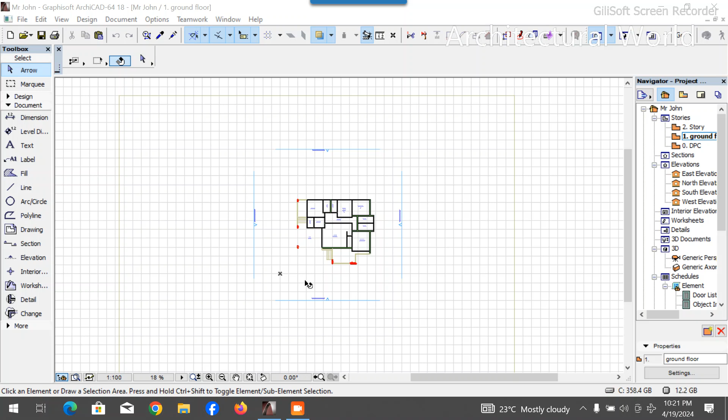So we're gonna be continuing from where we stopped previously, on our previous class. Okay, so let's keep going, guys. Let's keep cracking. Okay, what we wanted to do was to extend this upward. Let's make this. I think this beam is too high, guys. Let's make a little reduction. Let's reduce the thickness of this beam to 150 millimeter.

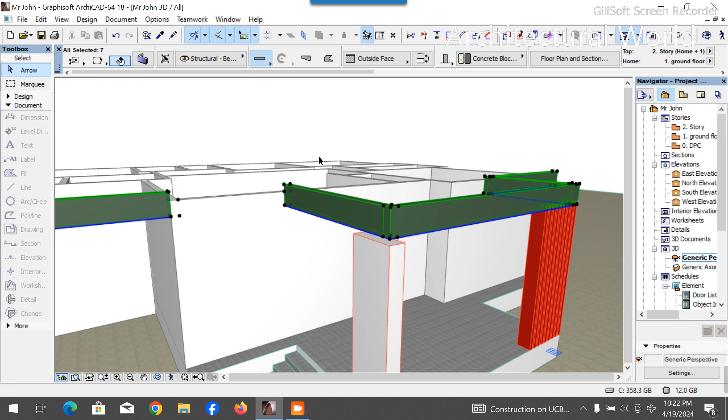Okay, let's change this first to 300. Let's bring it down to 300. Then let's change this to 150 millimeter. Okay, that's 150 millimeter. Okay, still on the high side.

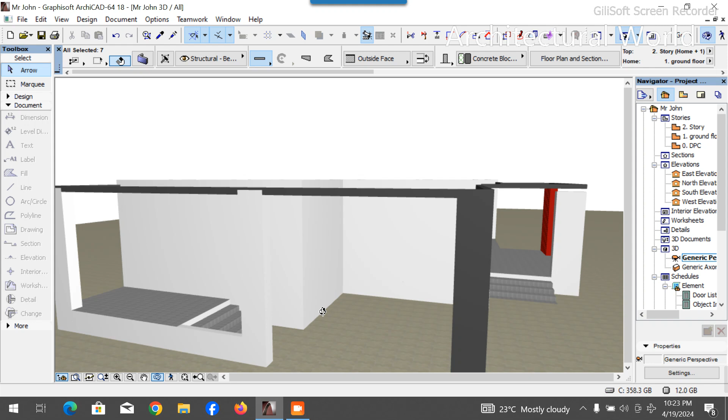Okay, minus 150 millimeter. I just want it to come up a little bit. Let's check something. Okay, 150 millimeter. I think I'm okay with this. I'm okay with this 150 millimeter. So let me take this one up a bit.

We're gonna increase this. Sorry guys, I'm not gonna be more audible because I'm stressed out. I just want to get this class completed before I do any other thing.

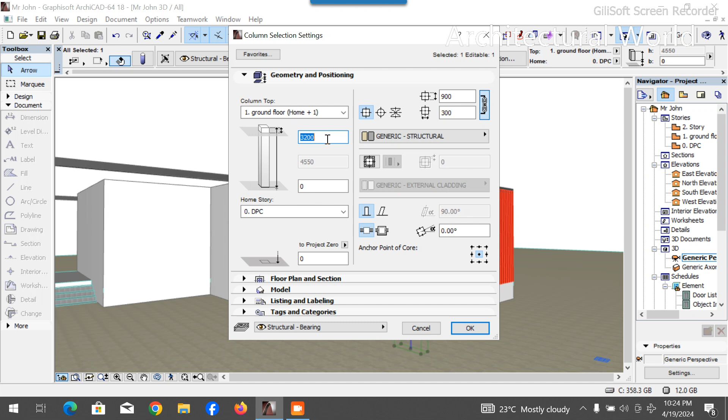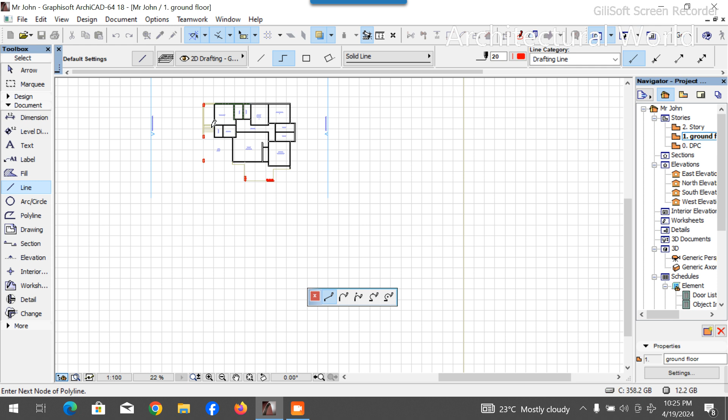So I guess you guys should already know what I'm doing. So just pick the right tools, follow what I'm doing, so you get it done the way I'm doing it. Okay, now we have this, and we need a slab. Let's go down to our ground floor and pick our line tools. I want to create a slab here. Okay, so I'm going to take a slab of 600 millimeter. I'll drop it here. I'll come down to this spot.

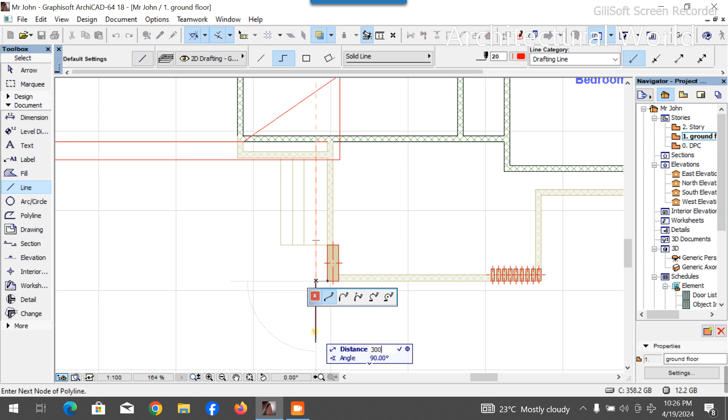I want to align this wall to this. Then take a slab of 450 millimeter. Align to this. Drop it here. Okay. Now I need a slab of 300 millimeter here. All those things that you see that I'm doing is a guide to the slab because I want the slab to be on a straight wall. So I'm bringing this here. Then I'm taking 300 millimeter from this angle, dropping it here.

Okay. I need a slab of 300 millimeter. I'm putting a line tool in the area where I need slab. I don't know if you get what I'm doing. I'm putting a line right at the spot where I need slab. Okay, drop this here. Align this to this. Okay, now I'm going to have a slab on all this section, and the slab is going to come directly.

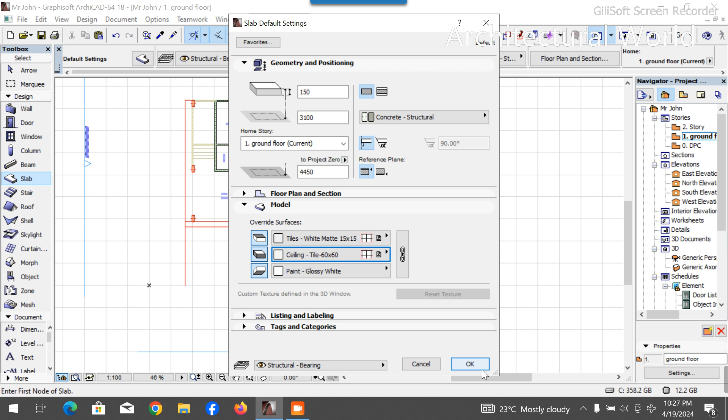Let's go to design tools, come to slab tools, pick our slab layout. Okay, change this to 150, then I change this to 3100, then that has to be ceiling. Okay, I click OK. I'll pick all my edges.

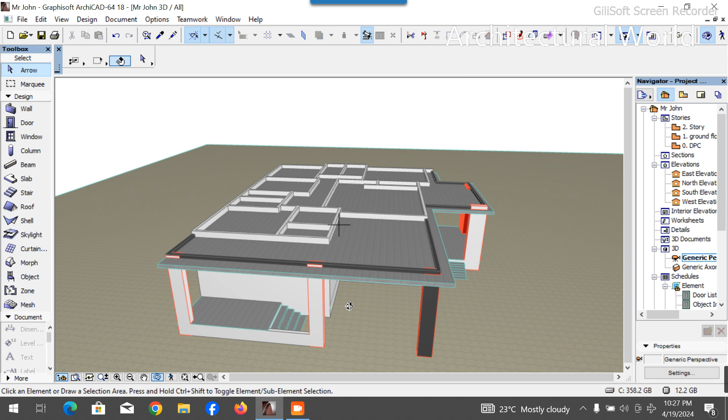So guys, you've seen why I created those lines. Those are a form of helping guides. These are the edges that I'm going to be clicking, and that is why I created the line to help ease my job. You can see very well for yourself. Come back to the end spot, I terminate. That is it. So let's go to 3D. Perfect. So we just created the slab. Come down to this angle, come here.

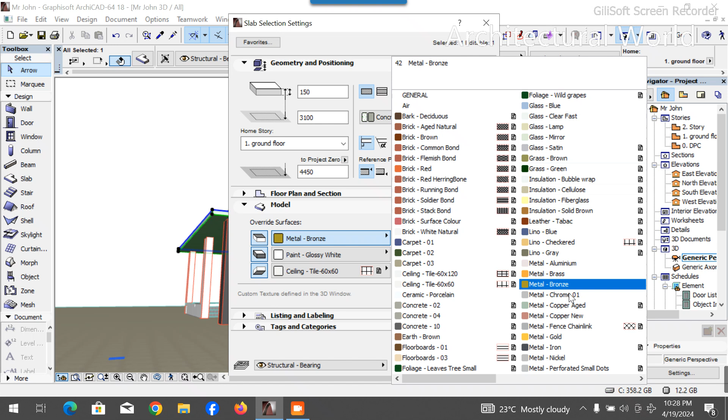So edge has to be glossy white. Let's change the edge to be glossy white, then the bottom to be ceiling. Okay, the top is not necessary. I think we should go with complete white everywhere. Let's change everything to white. Let's go for the glossy white. Okay, glossy white. Link all surfaces and click OK.

Now we still need to work. Let's make this to be 2.3 meter. Push top. That's going to be 2.4 meter push top. Let's see. 2.4 meter push top. Okay. Let's increase this to 50 and see. Okay, perfect. Perfect, guys. So it's coming out greatly. Let's keep going. Okay.

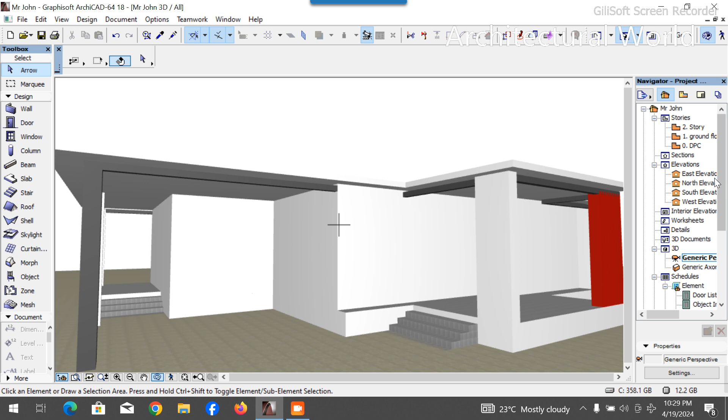Ouch. Sorry, guys. I just made a mistake. I don't want to design it this way. Let's take this slab off first. Then let's come to this way and take a slab tool here. Let's create a slab from this angle to this angle. Then we have some slab at this spot and some slab at this spot.

Sorry, there's something I want to design. I want to have a double slab, so let's align this wall. Then let's change this to 225 millimeter. I want to have a slab here, a column here. Then let's drop this here and align this. So let's go back to our design tools.

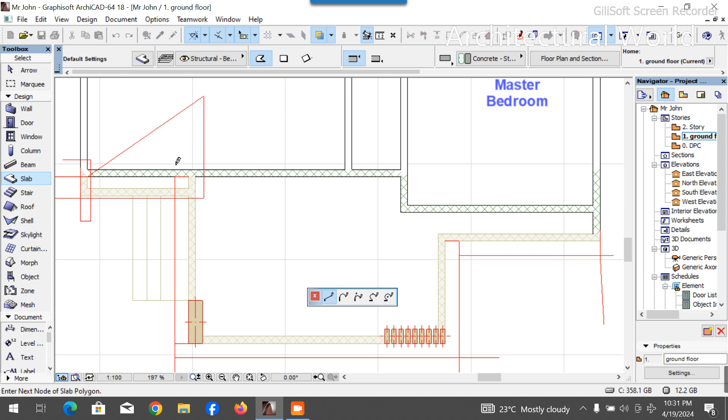I'll pick a slab layout. Take the first one from this angle to this angle. Then we have this. Okay. To this angle. Let me think of what I'm creating. Let's add this. Okay. We have this, we have this, we have this, and we have this.

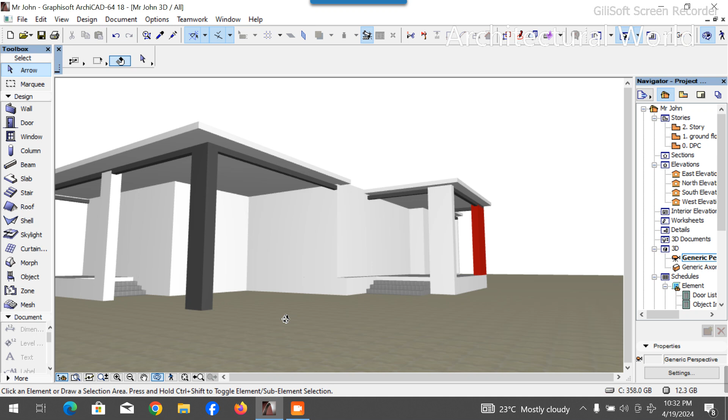So we change this to 3400 as we did the first time. 3450. Okay, 3450. Let's see that on 3D. Okay, 3450. Let's change this to glossy white. Bring this down. Okay.

Now we're gonna have a column here. Let's copy this column, paste it here. Then we change this column to 225 millimeter, 225 millimeter, and we change this to, okay, we can let it be that way. So we bring this to this. Perfect. Let's see that in 3D.

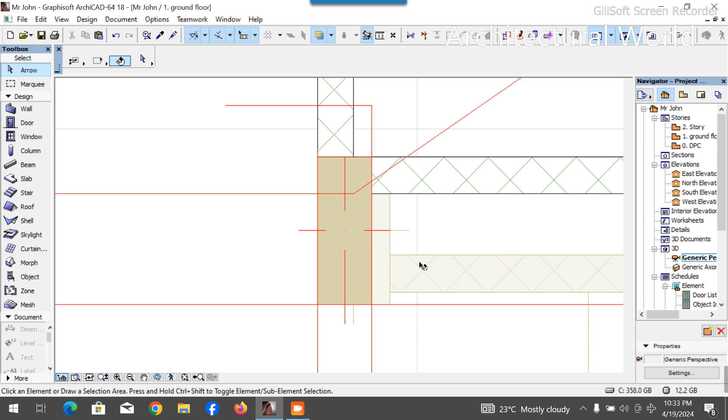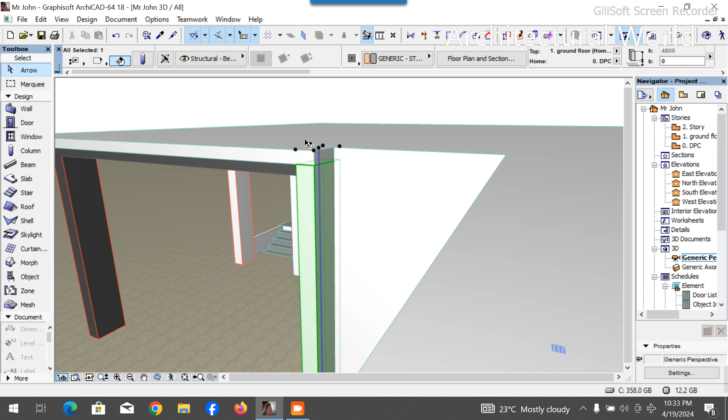It's white, glossy white. Okay, let's go to geometry. Let's change this to 3450. Perfect. Okay.

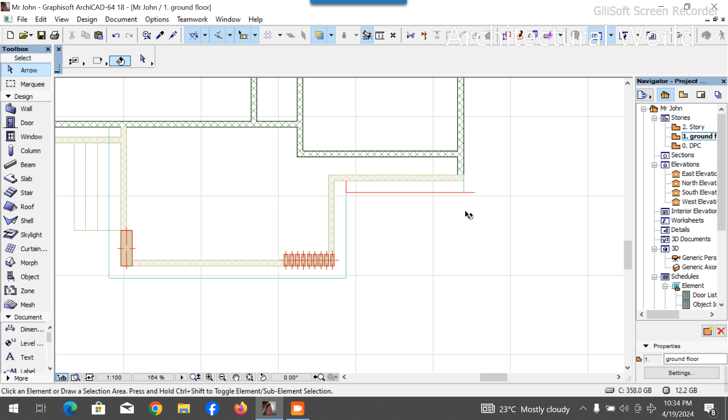So right now, let's work on the door layout. Let's go back to our ground floor and create our openings. It's time to create our openings. Now we won't be needing this anymore. The guides that I created the first time won't be needed anymore, so you can take them down now because their job is done. Bring this off, bring this off, bring this off.

Okay, let's go for our doors. Come down to our door settings. We pick our double entrance door. Let's choose this. Then we'll come to the spot. It's just a simple addition. Let's change this to 300 millimeter. Then we'll come here and change. We're gonna put this to this. Then we put the handle to this. We change this, so solid panel.

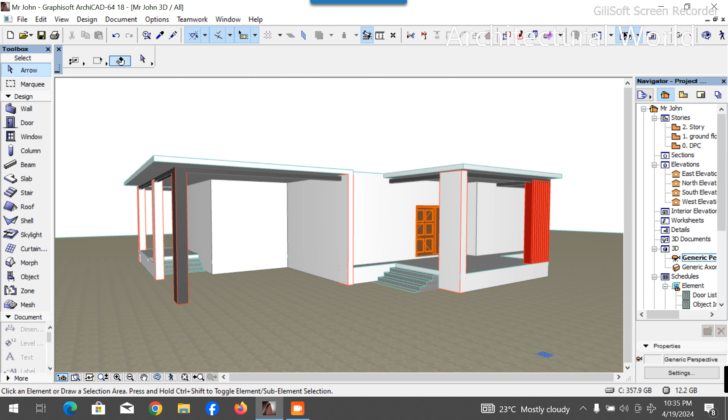We come down to this. What am I going to change? Okay, come down to layer. It's showing me glass layer, so come to model layer. We unclick use object, then we click OK. Here is where we're going to place our door. Let's drop the door. Okay. Let's see that on 3D, guys. We just have our door.

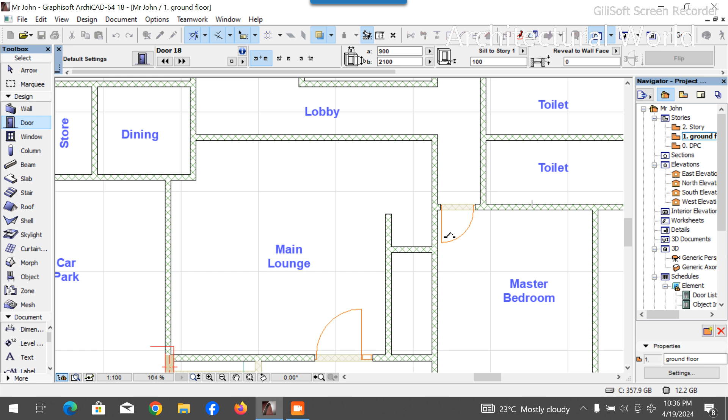Okay. So let's go back to door settings. Pick single doors. Let's pick a single door. Come here. Right here, we have to create a door. We need a door of 900 millimeter here. One door is needed here. Another door here. I want this guest room to face this way. Then we need a door here.

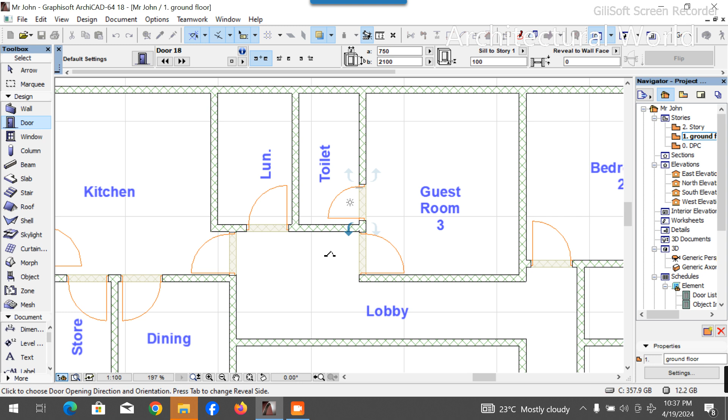We need a door here. We need a door here. We need a door here. Okay. Let's change this door to 750 millimeter. Toilet doors: I always use 750 millimeter for my toilet doors. So we're having a door here. Door here. Guest toilet door here. Okay. So let's drop this.

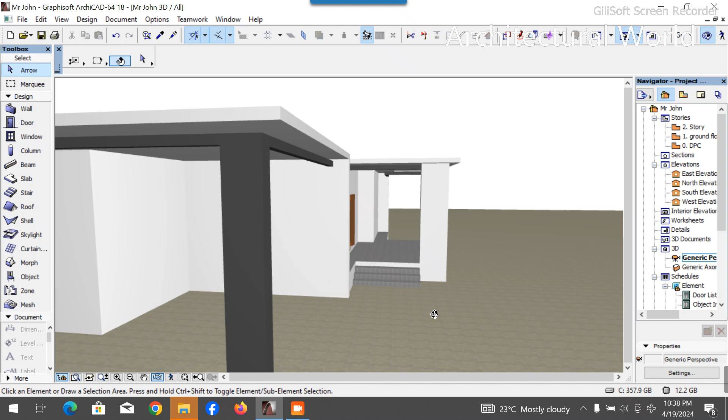Okay, guys. Let's say doors are completed. Let's see that on 3D. Perfect. You can see our doors are all completed. Okay. What else do we need?

Let's go for our windows to help bring out the beauty of what we are designing. So, come to window settings, change this to 900, sill to story, change this to 730 millimeter, and that is all you need to change here. Nothing much. Let's have a double sash window here. Let's have this, and let's have this. Since the garage is an open garage, I think we should have a window here, and also a window here. Let me check something. Hold on, guys.

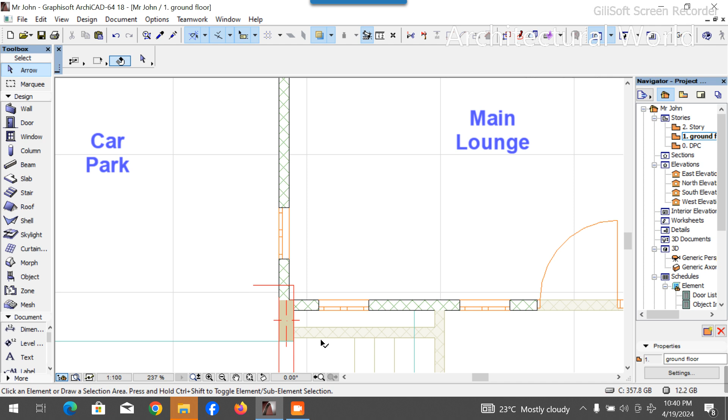I think this window is kind of big, so I'm going to change this window to 750 millimeter. Okay, kind of okay with this. So I'll drag this a bit this way. I don't think I'll be needing this. Okay, so I'll go back to my window, then I'll change this to 750 millimeter like I just did.

So I'm going to place my windows. I have one here. I have the other one here. I have one here. Then right here, I'm having two. Then kitchen, I'm having a double window here. Okay, laundry, I'm having this here. Okay, so dining, I'm having this here.

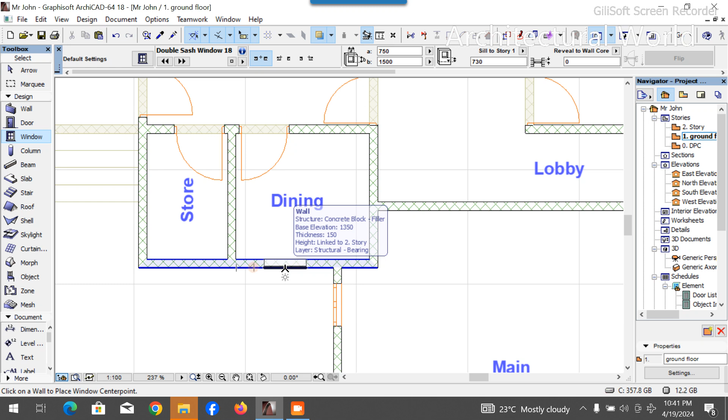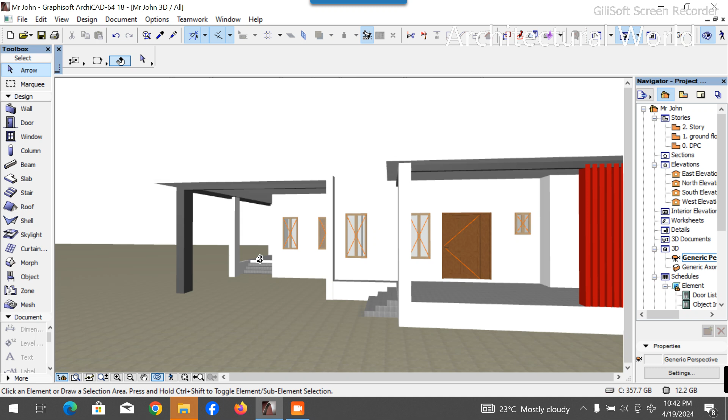We need one here. We put in another one here. Okay, let's go for this. Come here. Then let's have one here. Okay, that is all. Save your project. Check it on 3D what you have done. Perfect.

Okay, guys. This is coming out great. So this is coming to be dark gray. I want to work on the color right now. Let's change this to dark gray. I think I prefer it that way.

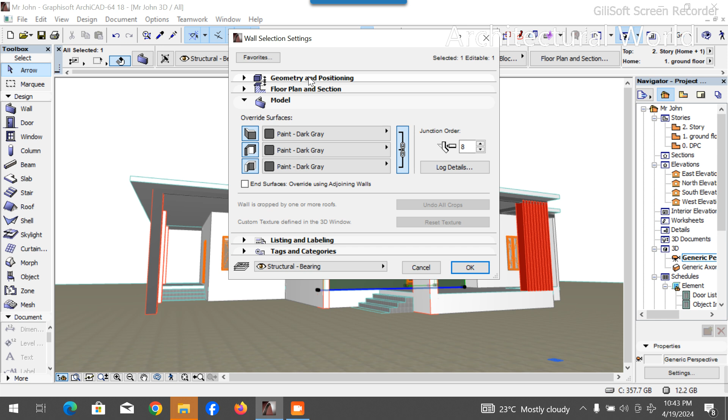Okay. Then I want to increase this wall by 150 millimeter. I want to add 150 millimeter, 1.5 meter to this. I think I'm cool with that. So I'll click this wall and add the same 1.5 to this. So how do I do that? That is to say, change this wall to 1650.

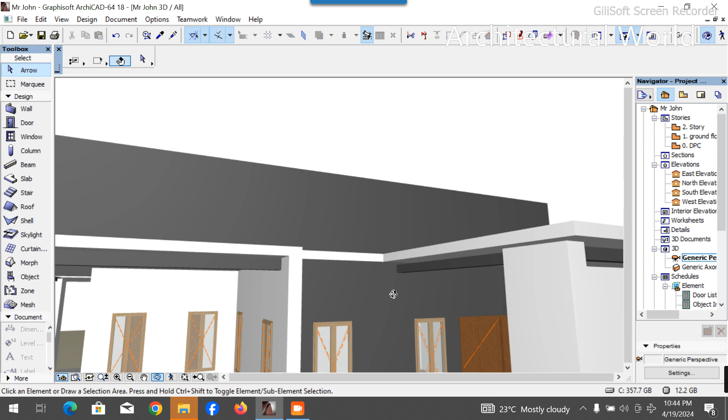Okay, I have to take away the 150 at the up. Let's make it 1500. Okay, perfect. So I got it right where I want it. Doing the same thing to this wall. 1500. Okay, that being done. We are having the same thing here. I'm adding 150 to this. Then click this wall. Add 150 to this.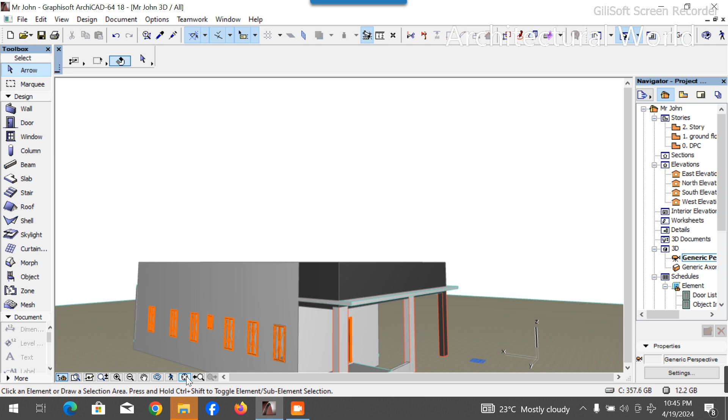Okay, let's rotate it this way. Let's go. 1500 to this, 1500 to this. You can pick these two walls and just get it done with 1500 to this.

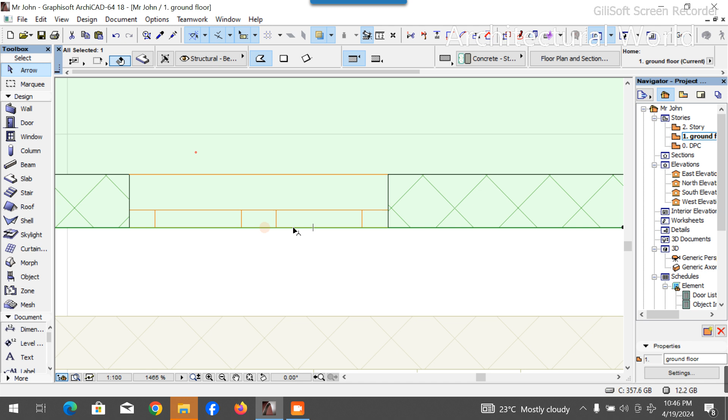Okay, so let's create this slab, it has to go in. So let's come here, pick the slab tools, pull it in, offset it in a little so it doesn't reflect. Let's see that on 3D. Perfect. So you can see it's no longer reflecting. Okay.

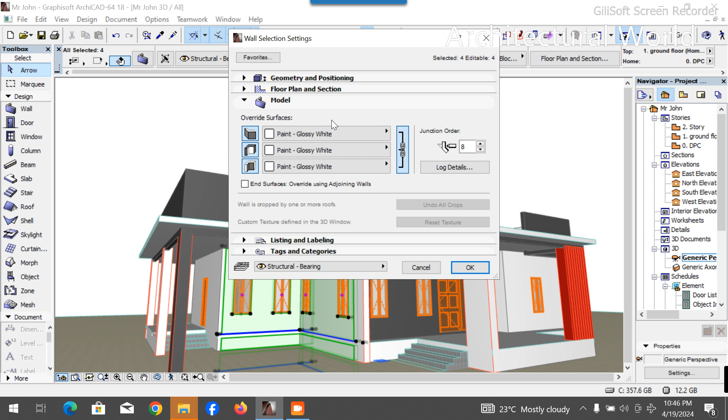So let's work this. Let's pick this. I want this to be one layer. Okay, I have to pick it with the ground floor. Let's pick this. Then change the model. I need a pattern model on that spot. Okay, let's try the wood model. Perfect. So I think this is okay. But we have to work on this slab.

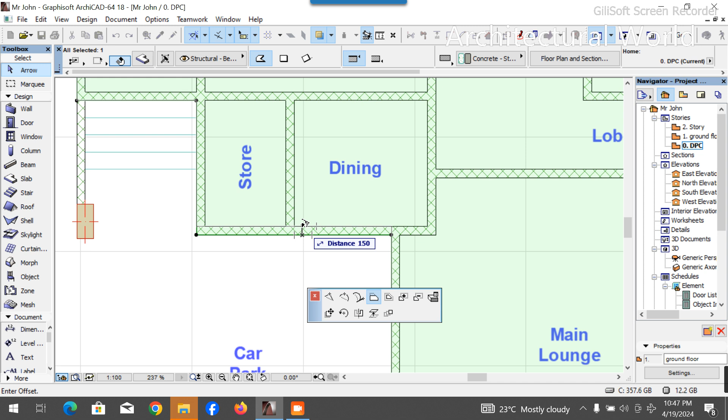I don't like it. So I'll come down to my damp proof course. Okay, I'll click this. Oops, this top. Okay, I have to move this off. Move off the concrete floor. Then click your slab tools and offset this in. Then likewise offset it this way. Check that on 3D and see before you go back. Perfect. I've taken it off.

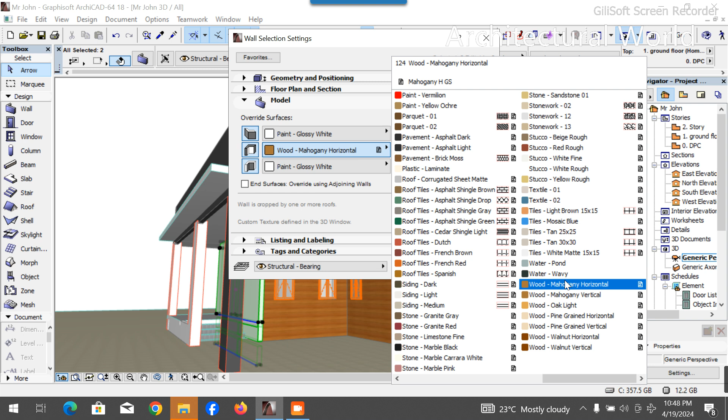So I'll go back to my 2D and move this back. Okay. So save your project, guys. Don't forget. Let's see what we just created. Let's change this edge. Let's have it along with this. We're gonna have a little disturbance right here. Unlink the surface, then go for what you choose, then align. Okay, so coming out greatly, you can see for yourself.

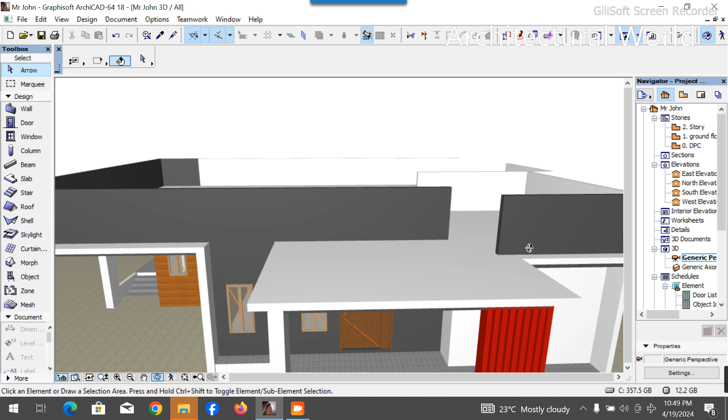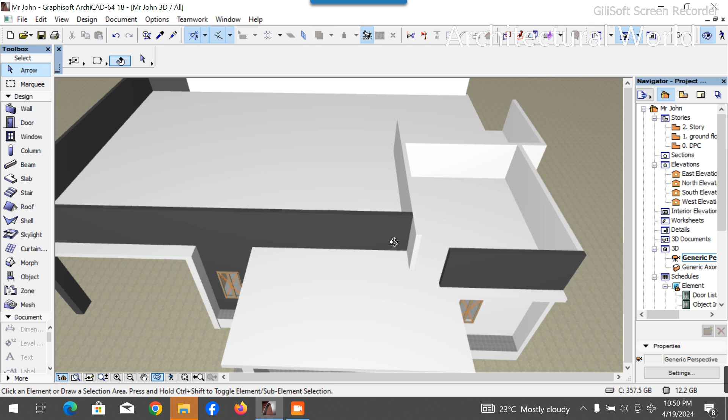What are we looking for? Need to align this wall. Okay, see. Why am I having this error here? I already aligned this wall to this wall, and this is the toilet wall. So that means this wall is not.

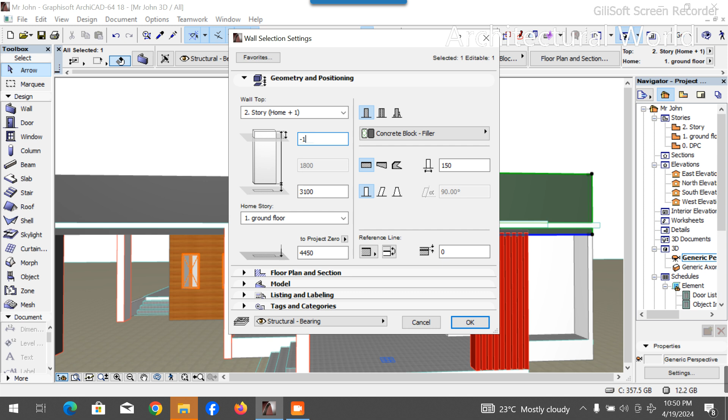I think I've aligned the wrong wall here. Let's just check something. I think I'm working on the wrong wall. I thought as much. I was working on the wrong wall. So which means I have to remove the 150 millimeter from this. This has to go back to how it was. Then this has to go back likewise.

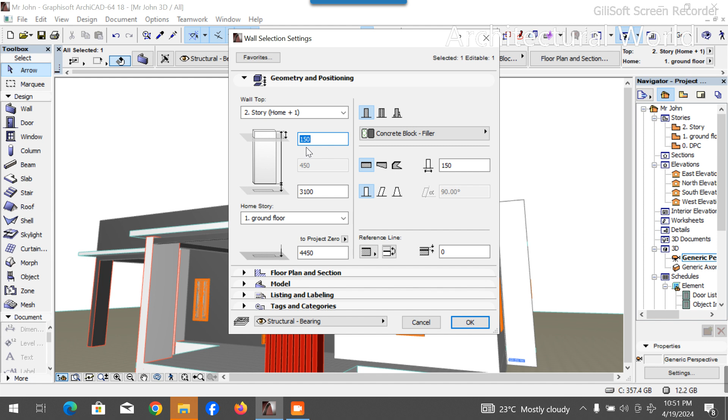Then I have to increase this a bit. Let's do this to be 50. Okay. Let's use gray on this. That's a balcony. So let's try the dark gray on this. Okay, coming out nicely.

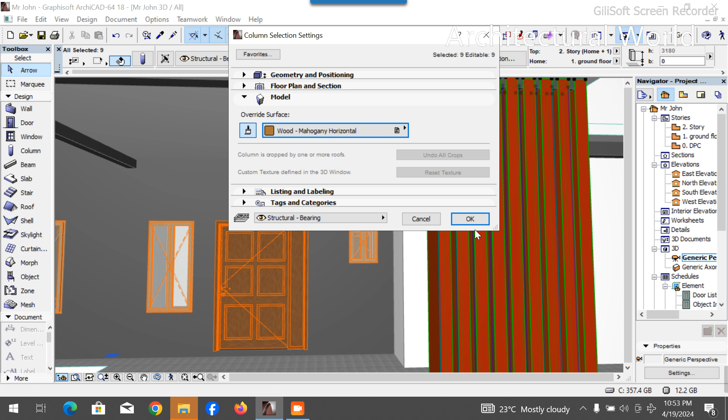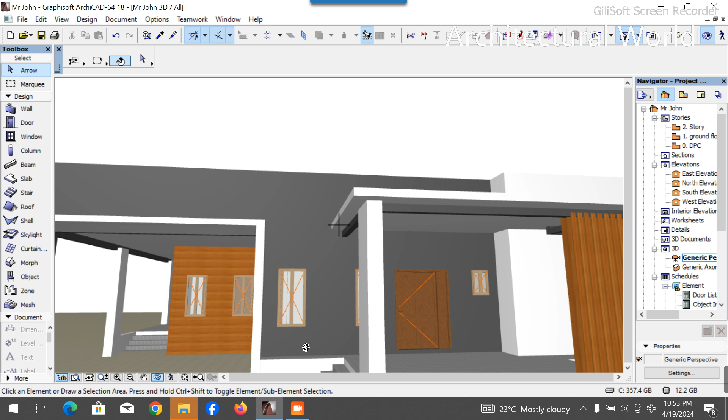Oops. Let's see what we got here. I need a different wall on this spot. So I need a shorter wall here. Let's go to our ground floor. I think we have to create a different wall here.

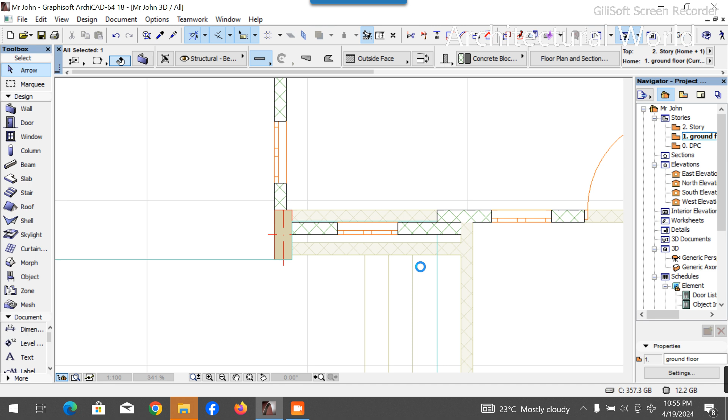Let's check something. Okay, I just made a little mistake. Let's work on this column first. I need a kind of color on that spot. So I'm having this color here, and I still want this color to come out some here. I don't want it that high, so I have to bring it down.

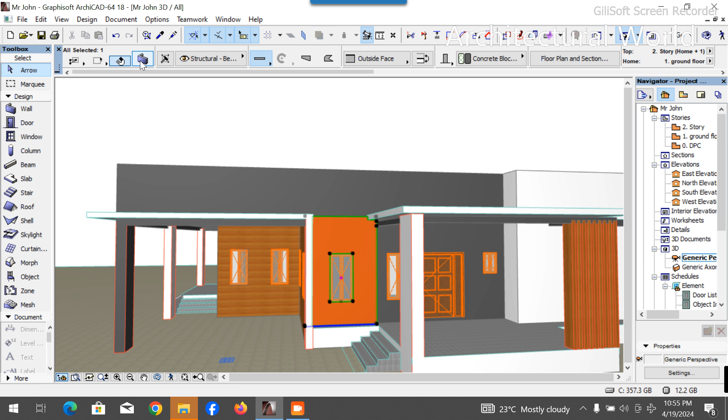Let me take away 300 from this. Take away 300. Okay, kind of fair. Okay, guys.

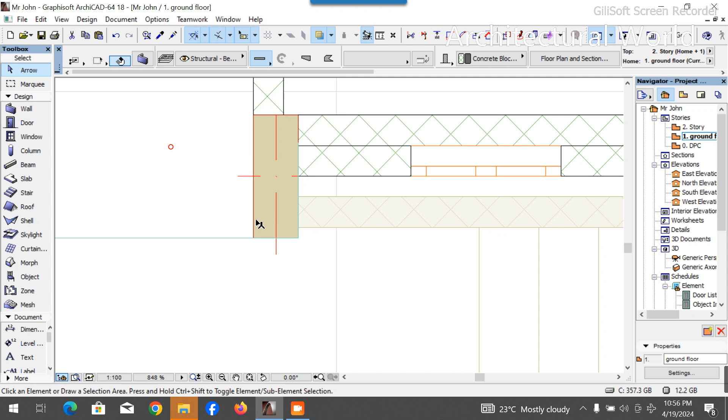Okay, let's come here. Let's pick this column. Okay, let's go. I need this to be here. So I'm gonna change this to 100 millimeter. Then I'll change this to 900. Move to match.

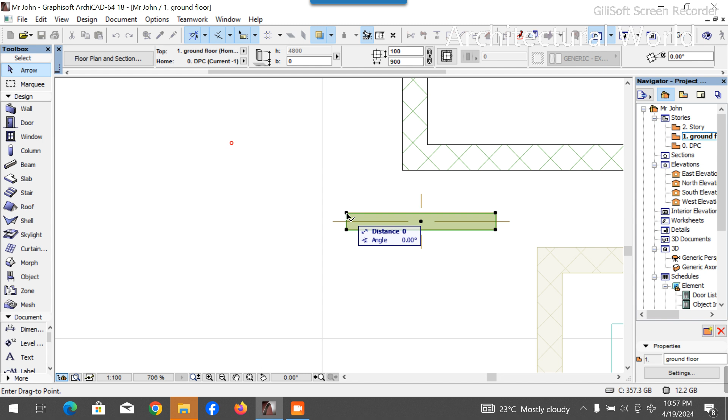Go to my settings. Come to the spot. I think I'm cool with this orange. Let's change this to the orange. I think I'm cool with it. Okay, I'm using the same. So let's check out on 3D. Okay, first I have to change this to gray. Let's go for dark gray.

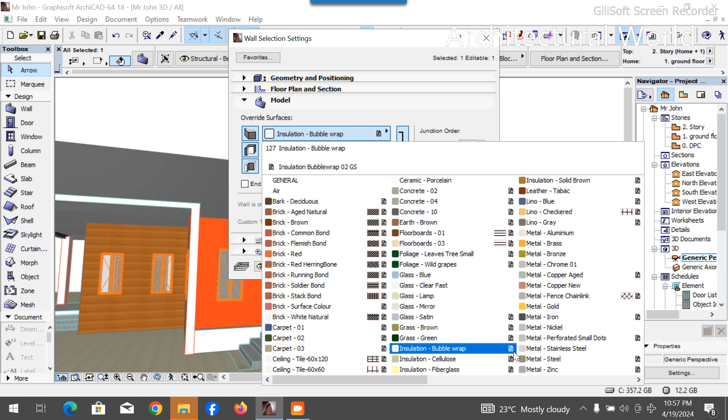Okay, I'm gonna solve that later. Let me just edge this first to dark gray. It has to be double wall there. So I'm gonna work this to, okay.

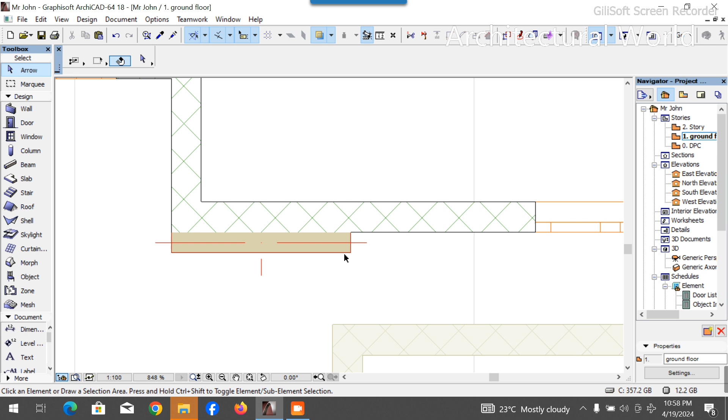So we wanna take this. You can decide to use anything to work this. Okay, let me take a slab tool for this. So I'll pick my slab tool. I'll go to my slab settings. I'll come to this way. I'll pick my orange. Okay. I'll link it all.

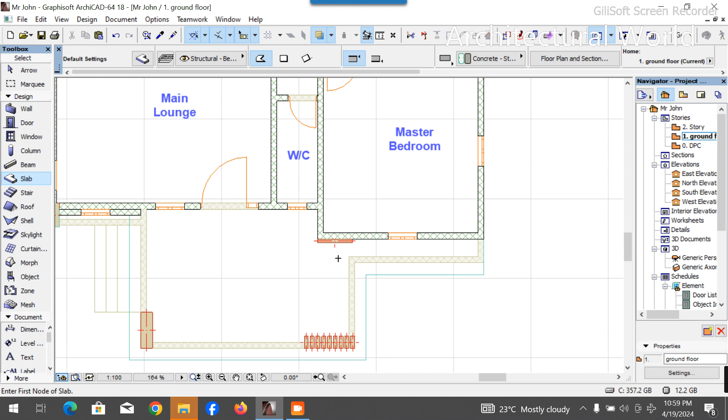Slab thickness, I'm gonna choose 700 millimeter. Then offset to home button. I'm going to determine this on the ground side. Then I'll take a slab square and pick this to match this. Okay, let's go.

Okay guys, see what I'm doing? So I'm just going to increase this slab thickness to be 900 millimeter and see it's coming down. So I'm going to take this to be 3400. To up, so I'm changing this to be 2600. Sorry, my bad. Coming to 3200. Okay.

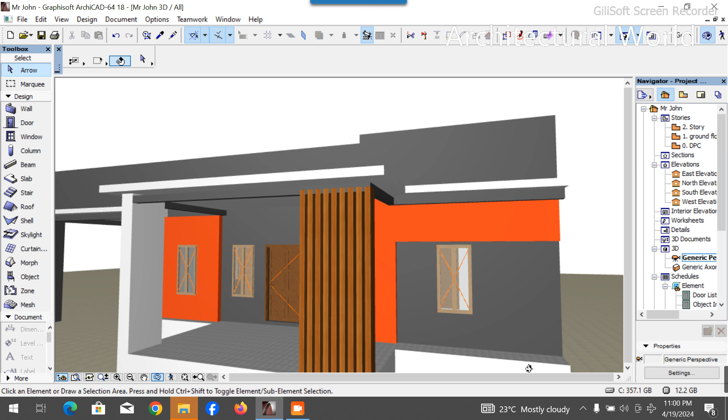Edge. Let's edge this to dark gray. Okay, so this is edged. I want this wall to be double wall. I want to create double wall here. So I'll come down to this spot. Then I'll pick this wall and drop it right here. Then let me align it. Okay, let's go.

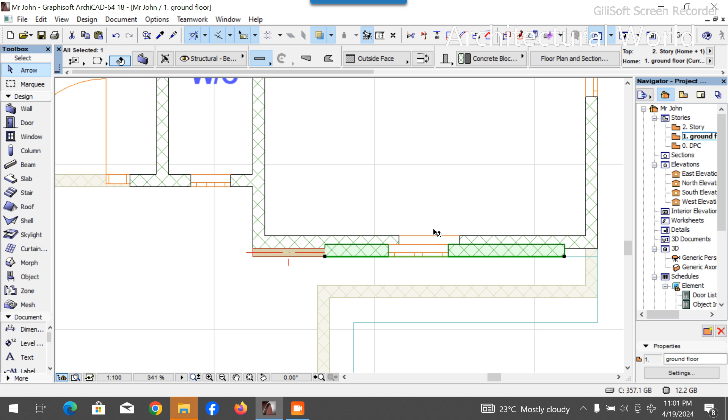I want to increase this wall to this wall. Then move this window to this spot. You can decide to take any of the window down because during construction you are not going to be using the double wall. The double wall is just for the spot. During construction you can work on the paintings, because I don't want to go through stress moving these walls up and down. That is why I'm creating the double wall for my 3D. So let's see something.

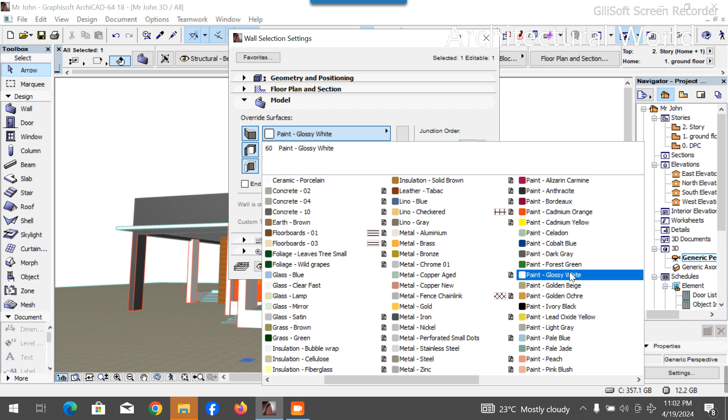Let's first of all change this to white. Let's go to glossy white, link all surfaces and click OK. Okay, don't forget to save your project.

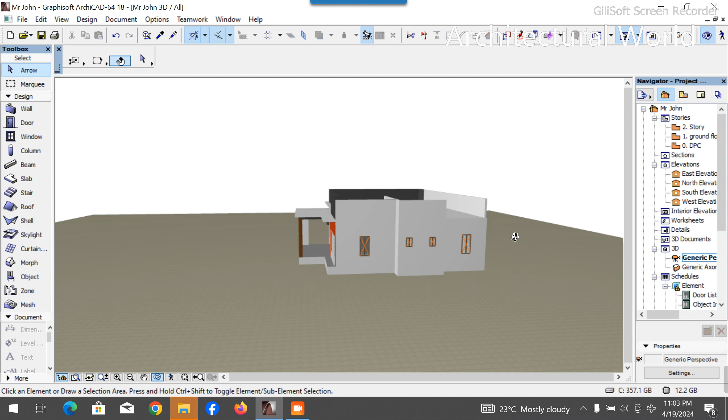Okay guys, let's put our rooftop first before we continue. We're going to be ending today's class on the rooftop. So let's go to the rooftop. I think one side is missing here, this side is missing. So let's come here, let's align this, then increase this geometry to 150 millimeter. Okay, so we come back here.

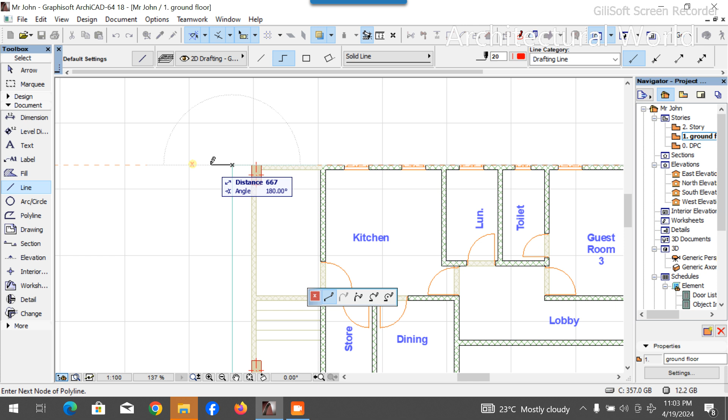Okay, so come to our settings and create a guide. I always tell you when you want to do some jobs that require a push out from what you have, always create a guide. It's going to help you a lot. So right now I'm going to create a guide of 300 millimeter to this. Then I'll drop it here. Then I'll come to the spot, create a guide of 300 millimeter to this, then drop it here.

Okay, how do I want this roof to fly? I'll come here, I'll create a guide of 600 millimeter. I'll drop it here. The reason I'm dropping it far is because after I create what I want to create, I can easily delete it without clicking other elements. So that is why you see I always take it far.

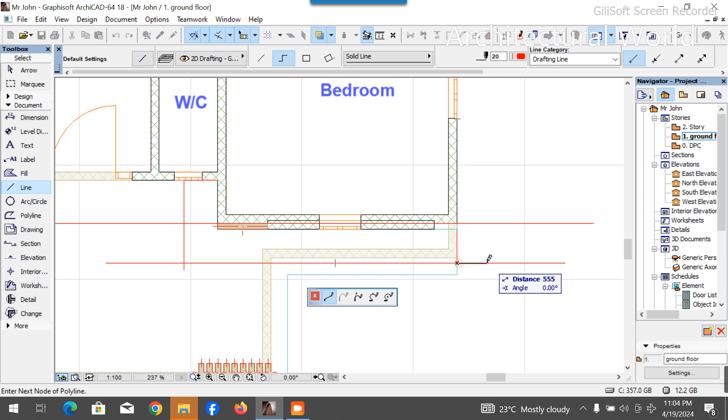So I'll come here, I'll create a guide of 600 millimeter. I'll pull it here and drop it here. Then I'll come here, I'll create a guide of 600 millimeter. I drag it here.

Okay, so I'll come here, I'll create a guide of 600 millimeter. Drop it here. Align this with a guide of 600 millimeter. Align it here. Create a guide of 600 millimeter. Align it here. Perfect. Okay, so I take the last guide of 600 millimeter, and I'll place it here.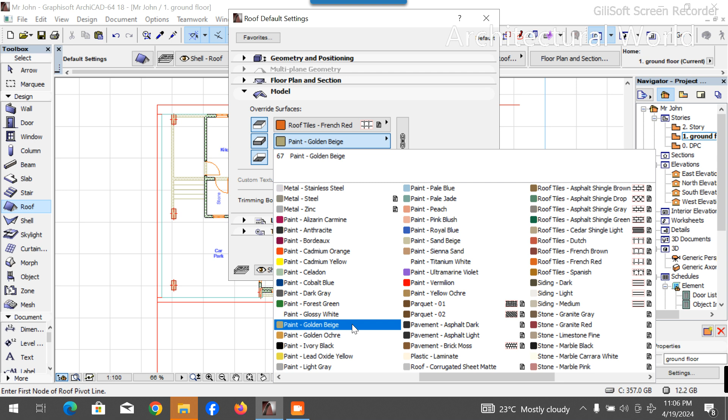Okay, guys, let's get cracking. Now, what do we need? We need a rooftop. Come to our design tools, come to our roof settings, turn on all these elements. You go for edge, choose glossy white. For the edge, glossy white. Okay, same thing to the under. Okay, then come to this spot, change this to 150 millimeter. You click OK.

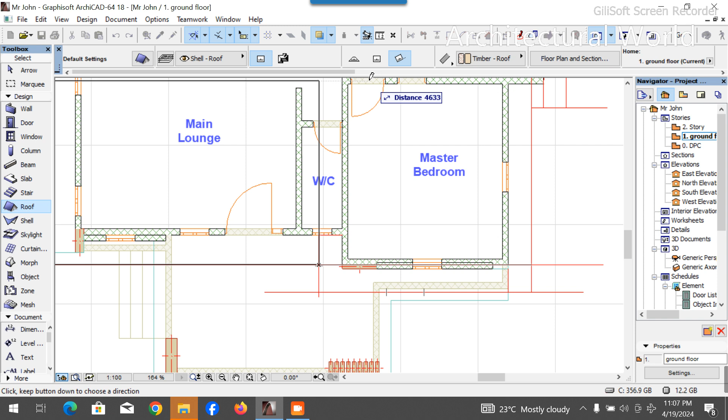Okay. So what are we doing? We have to look for the sides that we need. So first of all, you have to draw a straight line, then you place it here. So you draw the roof now. Let's see the sides that we need. Okay. So we have to see if this is what we need. Let me just check it first. I want to see the side the roof is facing. You see? Wrong side. So let's take this down and start properly.

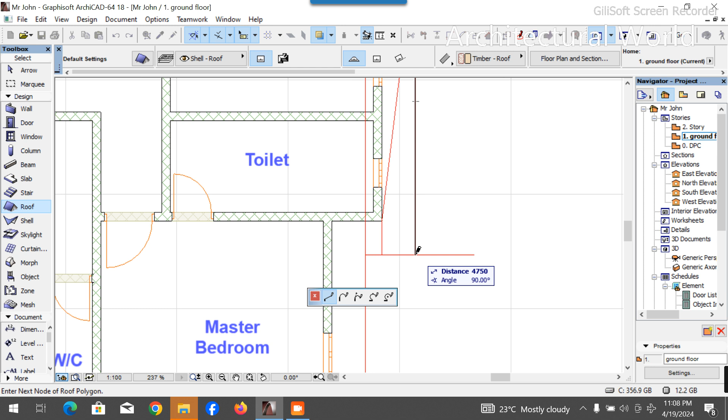So I'll take my roof plan, then I'll click this part to this part. I click here. So I'll drag the roof this way. Always make sure you are clicking the guide you created. Okay, so I come here, I click here. Okay, let's see that in 3D.

Okay, whoa, this is like a mountain. Don't be scared, guys. It's easy. It's just for you to bring the degree down to 5. You can see, guys, it was easy. So let's start. Let's take this to 6 and check it out. Okay, let's keep going. Let's take this to 8. Check it out. Okay, then let's do this degree to 1. Okay, we now have the degree to be 1. Then we are changing this to 4,500 and check something.

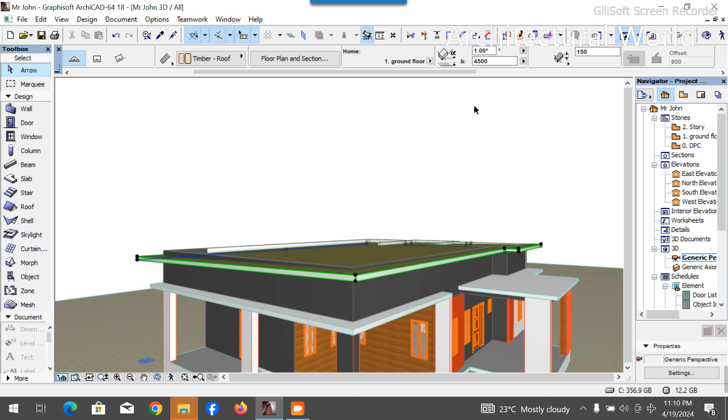I'm trying to work both on the back and on the front. So it still has a way to climb. So let's change this to 500. Okay, I think I'm okay with this. So since I'm duplicating this wall, I could decide not to trim all elements yet. So I'll just create a copy of this, paste it here. Then I'll come down to my ground floor.

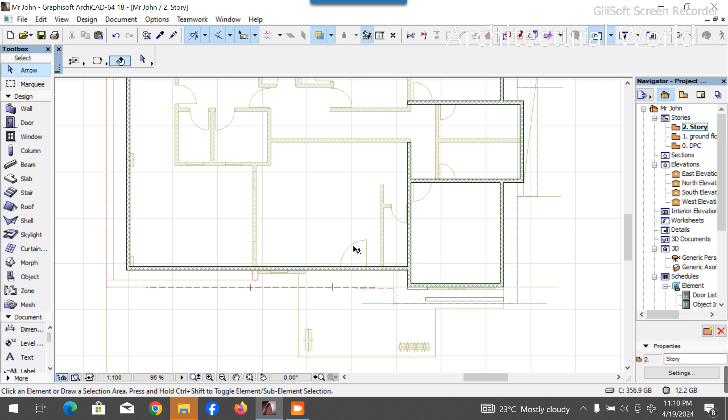Can this edge be edited? Okay, story. So let's check. 4650. Offset all edges. Are you sure we can offset all edges? Offset all edges to 300 millimeter. Let's check that in 3D. I want to go with up. Okay, perfect. So I just got what I want. Now let's see if anywhere has to be trimmed.

Okay, not all parts, but some parts need to be trimmed. So you can decide to trim this place to roof shell, but I don't think I'm going to be doing an elevation that's going to be showing the upside. So no need for me to stress myself on that. Okay, so it just came out nicely. You can see for yourself.

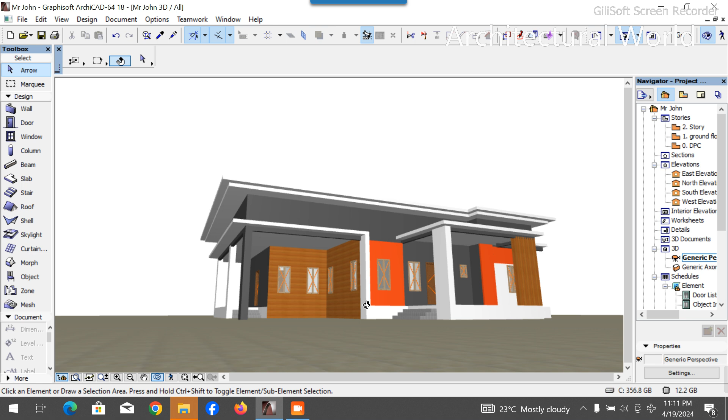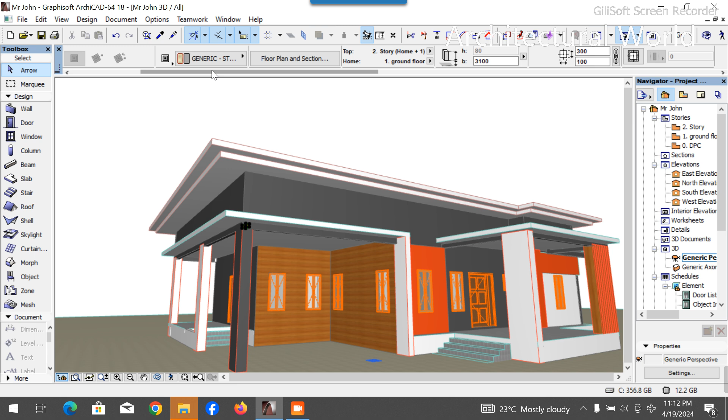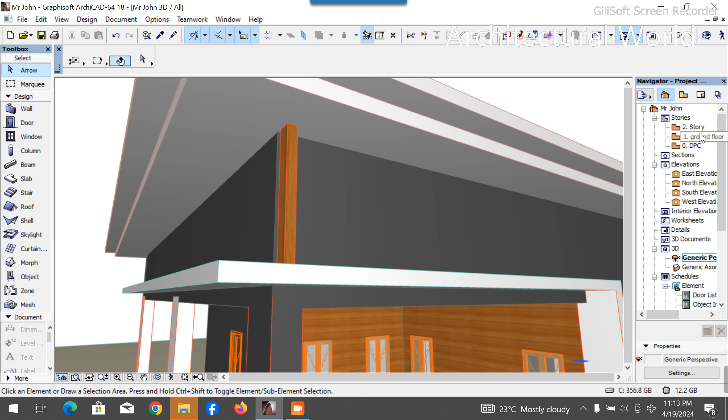Okay, so I'll change this to 300. Then I'll come to this place and change this height to 300. Okay, I think I'm cool with this. So I just have to change this to 150 millimeter. Okay, perfect. So I'll come back to my ground floor. I guess it's on the story part. Okay, story part. I'll move this to this. Let's see that in 3D. Perfect.

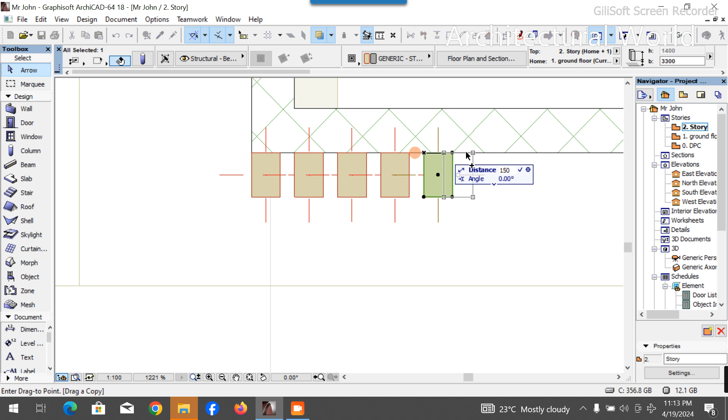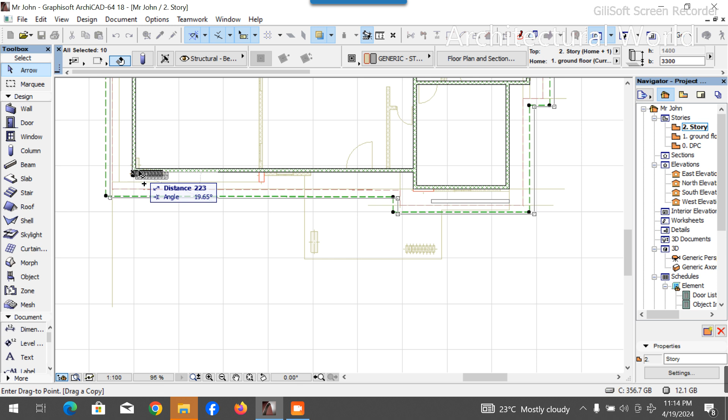I want this to come this way too. So let's take this. Let's create a copy of this and bring it right here. Okay, let's check that in 3D. Perfect. Okay.

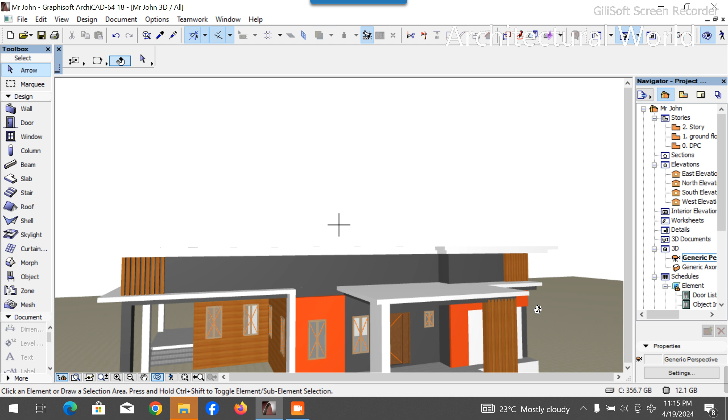Do you think it's too close? Should I have spaced it to 200? I think it's too close. So let's space it to 200. Yeah, it's too close. I don't like the spacing. Let's use 200 for the spacing. Okay.